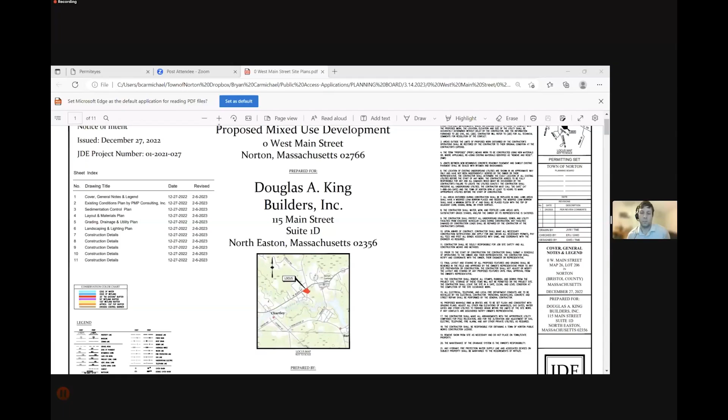Good evening, everyone. Greg Driscoll of JDE Civil here tonight representing Douglas King Builders for 0 West Main Street. All right, so the project is...

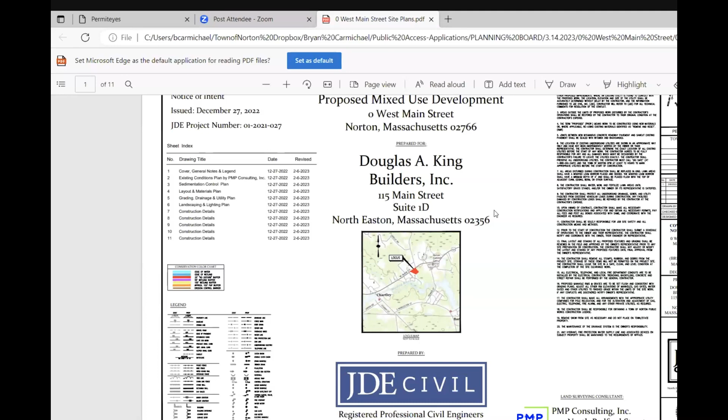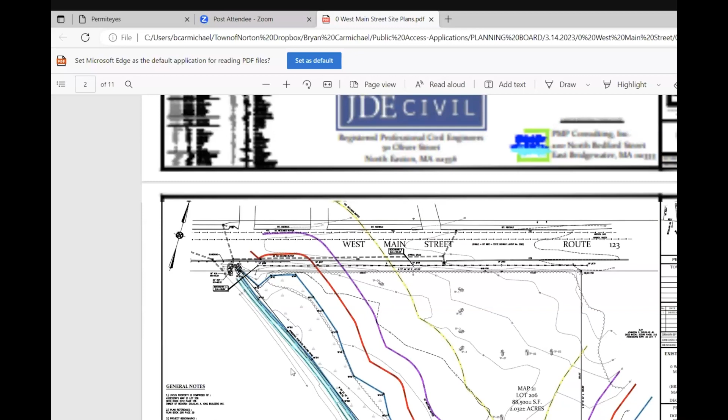We're located on 0 West Main Street, which is just west of the church and the middle school. We abut the River Crossing condominiums to the west and south. The site is located in the Village Commercial District.

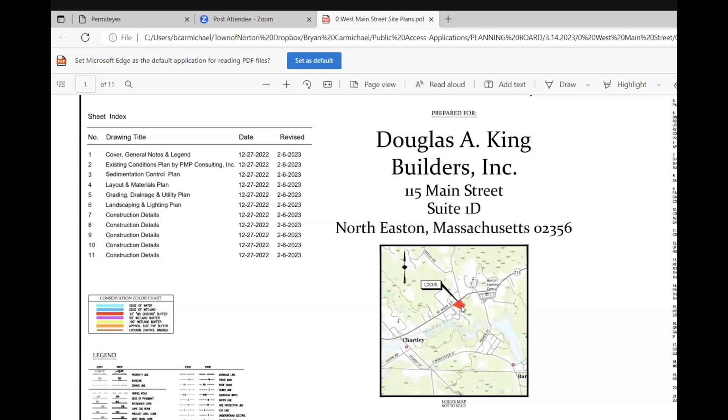So the existing site, if we could go to sheet number 2 - existing site is unimproved currently, so this is a new construction project. We were before conservation first for a determination on the drainage ditch there, and it is an intermittent stream. We just got order conditions issued last night for notice of intent for this project, so that's pretty much all set. Just waiting for them to issue the order.

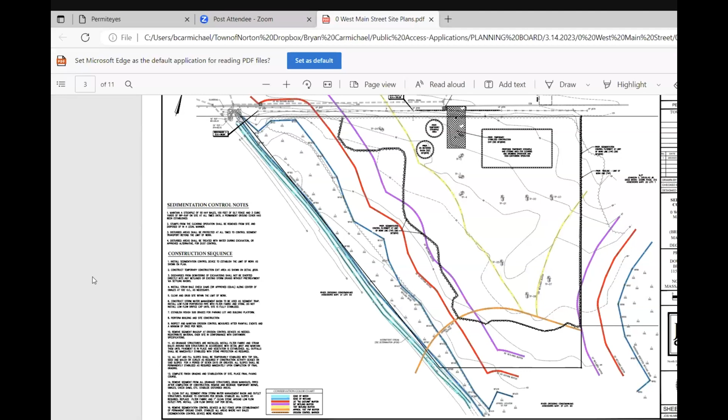If we go to the next sheet, sediment erosion control plan - this is pretty basic, showing the limit of clearing, perimeter, erosion controls, sedimentation controls, and limit of clearing. We're showing stockpile and staging areas, construction entrance, all that type of stuff that is typical.

The next page is the site layout plan showing the building. This project is for a 2-story building, 4,000 square foot footprint, 8,000 total. There'll be a 4,000 square foot dentist office on the first floor, and on the second floor, 4 one-bedroom apartment units. This is located in the Village Commercial District, and it's a mixed use we're proposing here, with top of the shop housing as defined in the zoning bylaw.

The site will be accessed from West Main Street, a full 24-foot aisle entrance and exit onto the site, showing appropriate stop bar and stop sign for the exits. The building is 15 foot setback from the front lot line. We have the 10-foot landscape buffer and then a 5-foot walkway to get to the front entrance.

We have 28 parking spaces. That's based on a calculation for office - I think it's one space per 200 square feet, so that's 20 spaces, and then 2 spaces per unit. We have 28 spaces required, and we're proposing 28, so it fits perfectly on the site.

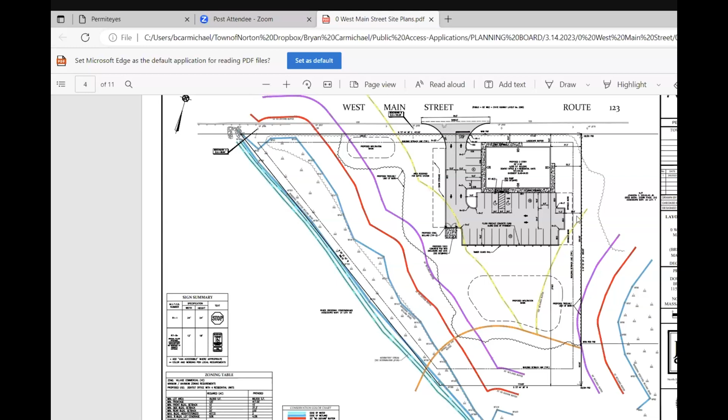If we go to the next sheet, below the parking lot you'll see we have the detention basin. So we have a proposed on-site septic system to the left of the driveway, right there, and then off to the south of the parking lot, we are sheet flowing the parking lot into 2 sediment forebays in order to get the TSS removal we need, and then an infiltration basin to hold, treat, and infiltrate the stormwater runoff.

There's also another smaller basin up to the upper left, on the westerly side of the site, that takes from a high point where the septic tank is down to the property line. There is a catch basin right there - we catch as much as we can of the driveway heading towards the street. There's also an existing catch basin in the street and the state highway layout. So once we get through the local permitting, we'll be able to go to Mass DOT for the access permit.

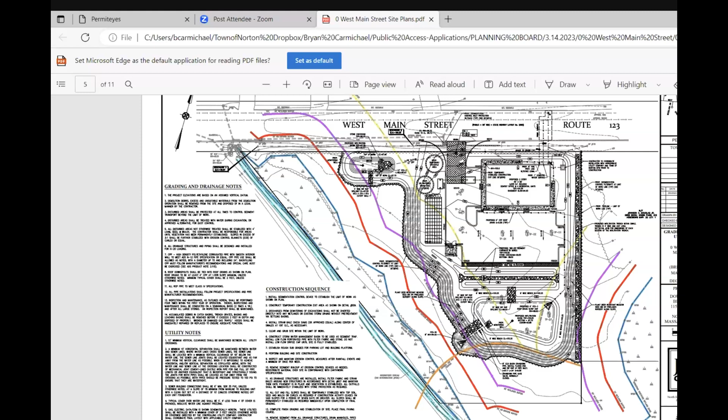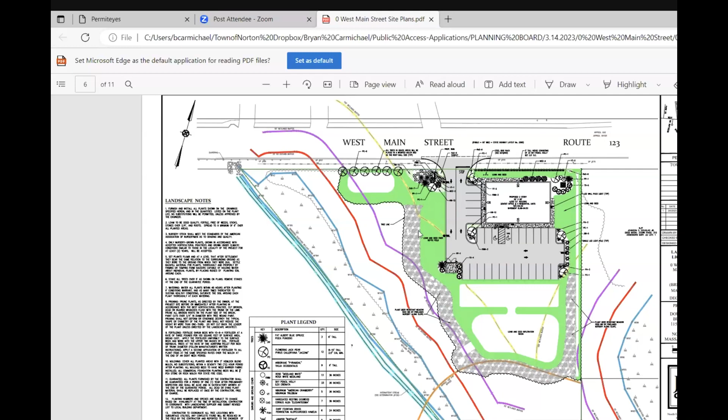If we go to the next sheet, we'll show the landscaping and lighting. We have a separate lighting plan as well, if you want to take a look at that - that's the landscaping we're showing for the project. I'm not sure if it's in that PDF, but we have a separate PDF of the lighting plan, and we show per the regulations that we don't have more than 1/10 of a foot candle off the site. I have that called up on mine if you'd like me to share. Take my word for it, that's fine as well.

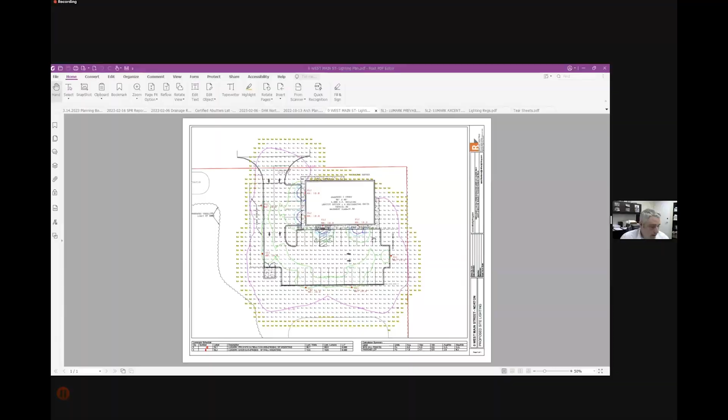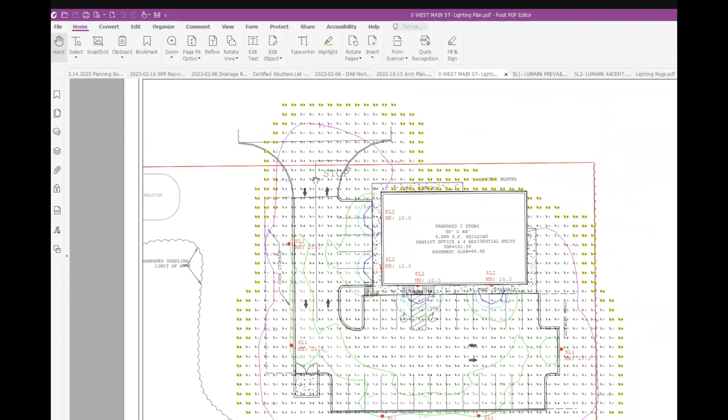So this is the lighting plan from Reflex Lighting. The highlighted area shows 0-foot candles at the property line, with just 1/10 of a foot candle a little over the property line here, but the rest of the site is all our property. We have a little extra light going out toward the entrance, since we do want that area a bit lit up at the roadway.

That's what we have there, and these are the cut sheets, which were also submitted and uploaded to Permiteyes for the fixtures being proposed. These are shown: this is the SL1 fixture and the wall packs are the SL2 fixtures.

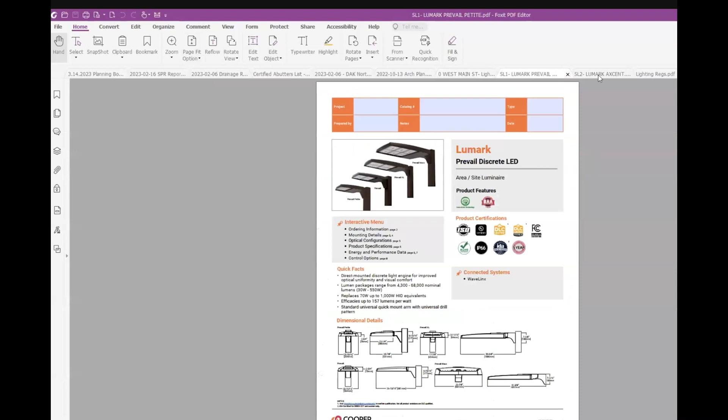I see a notation on there, MH20. Is that in reference to the maximum height of 20? Yes, and that's how they modeled the lighting spread as well. I believe that's the max height for the bylaw. Is that correct? Correct.

We were also looking at the lighting plan without the explanation, so let's make sure that's what we're looking at here, and there isn't an additional waiver or something requested. Yeah, no, I don't think we're requesting any waivers.

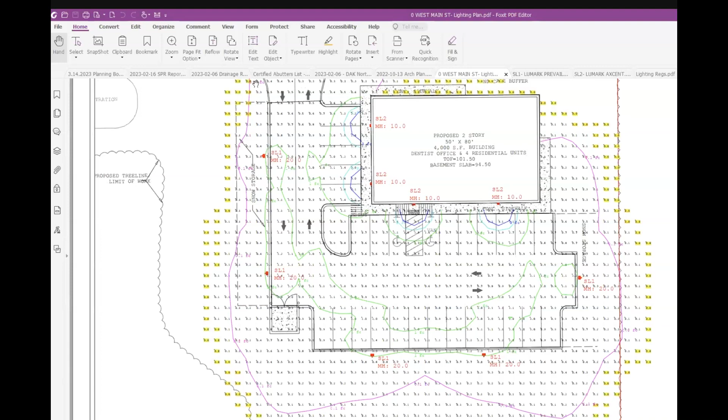I have those in the cover sheet. And then here are the building plans. These were also uploaded to Permiteyes.

So, exterior elevations, front and side, and all four sides. This will show you which ones are which.

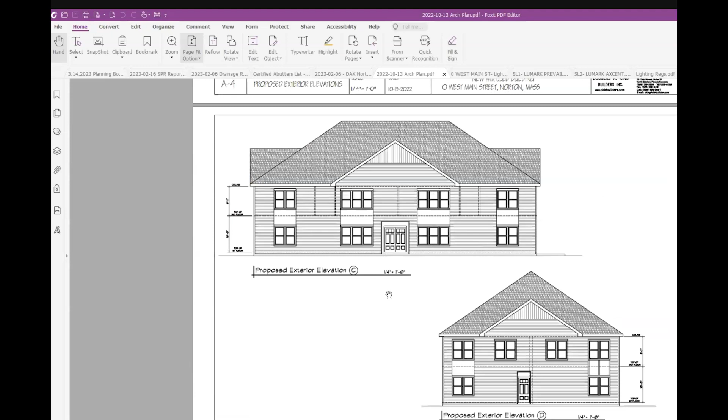Can you just, this may be a simple question, sorry to throw you off, but looking at the layout, can you walk me through how people go into the building for the apartments? Sure, because with the layering, I know they don't go through the dentist office.

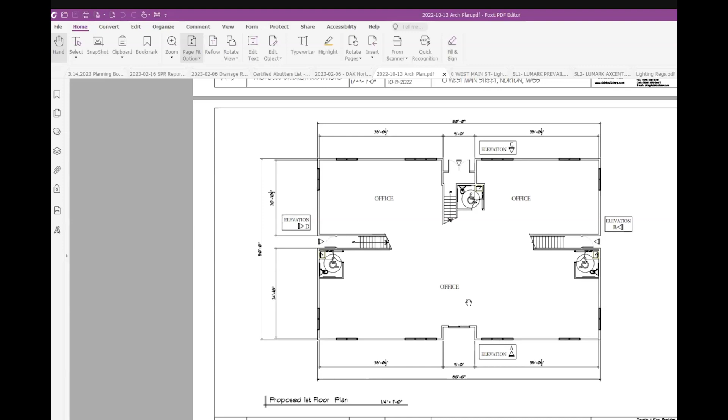So this is the front part of the dentist office - this will be the entrance directly into the dentist office. On the sides, these are egresses for the apartment units heading downstairs. Right here is a foyer, off the back parking lot. You come in and can go up to the apartments - I thought they might have had access to the dentist office, but I'm not sure that they do. And then on the second floor, you can see the stairway going down that way.

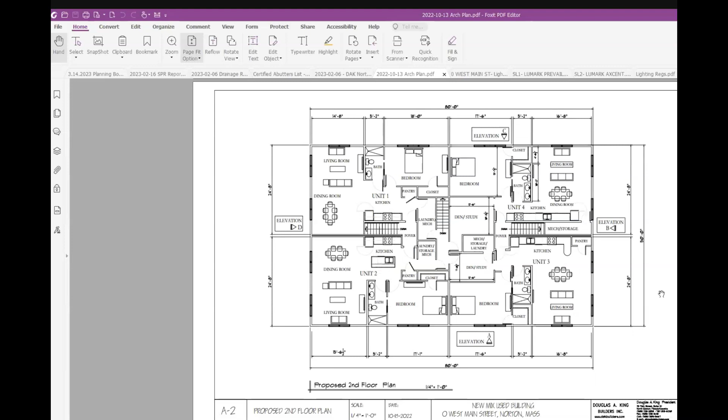So in theory, they're all entering from the rear of the building as we're looking at it from Main Street. Correct. Okay, that's pretty much what I have for the overview.

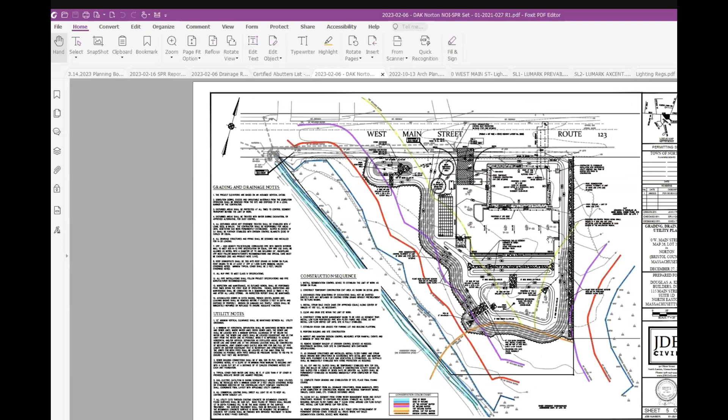That's pretty much the overview of the project. We did receive comments from the fire department regarding the fire service. We're showing right now one tap off the main and then the domestic off of the line here, but they want us to have two separate taps at the main, so that's a revision we'll make.

And anything else that may come from the board tonight? Okay.

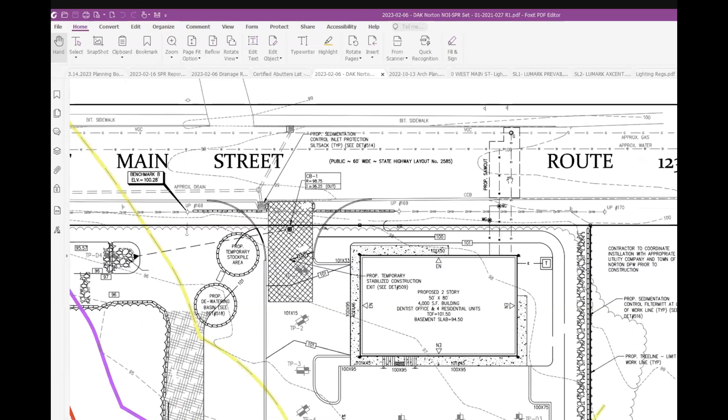Maria, I know you had a couple of comments that you shared with us in your memo. I got the answer to the lighting question, but you also had some potential notes regarding buffer and screening, correct?

Yes, so our bylaw requires 20 feet of screening to abutting residential properties, and I believe it's the eastern side - you would need a landscape buffer there, and you don't currently have one. So that would either require a waiver or an amendment to the plans.

And I don't know if you got the memo I sent. I did not. Okay, I can send it to you. But it's section 6.5 of our bylaw, because it's a commercial district abutting a residential zone. That's why we require 20 feet of screening.

Okay, residential zone or residential use? A boundary, it actually doesn't matter - they're for both. In this case, because it is a residential property, regardless of zoning district, it's 20 feet. If it was a residential zone, it's 50.

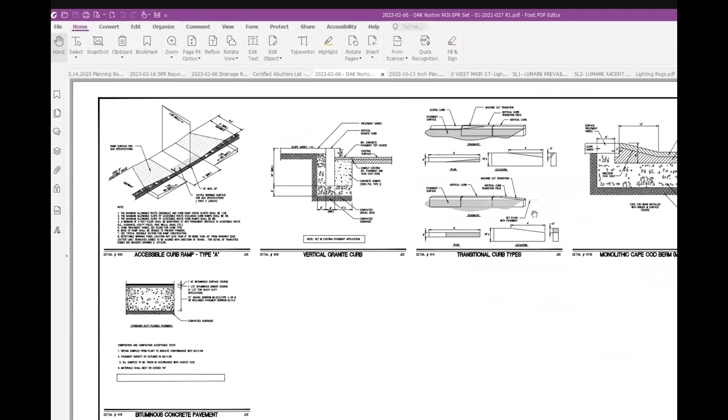Do you have any proposed signage for that dentist office? We are not showing it currently. There's a sign shown right here. I don't know if we have a designed sign, like what they're actually going to put up, a rendering and everything of it. But I can add something like that to the plans - I can add a sign detail.

That's what you prefer, that would be great. We have a sign bylaw and I'll send you the section, but we allow up to a certain dimension depending on the district, so I just want to make sure it's the right size. They have to be illuminated by exterior lights, not like a billboard type sign, etc.

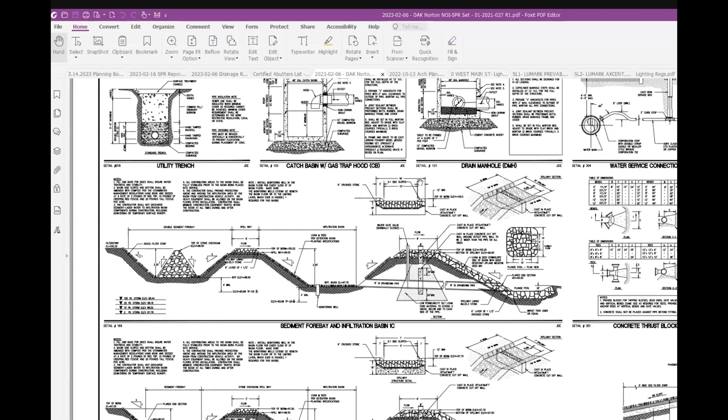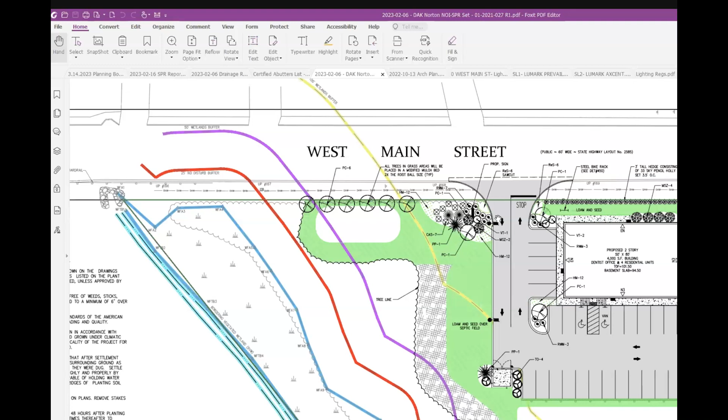And I had one last thing, and this might be really minor, but because you're in Village Center, we have a requirement that you need lots of windows, but they don't say what lots of windows means. So I don't know if the planning board thinks the architectural plans satisfy that requirement, because we don't have a threshold for it. I can pull up the language - it says you should provide an appropriate proportion of first floor facade as windows, doors, or other treatments sufficiently transparent to provide view to the interior of the building. But I don't know if that's 20% of the building or 40%.

I don't know if the planning board has any strong feelings on our bylaw. I guess I'll throw that to the board and ask how they feel about what we're showing.

Thank you for highlighting that, Maria. Of course. Yeah, I'm not sure - at first blush that seems appropriate to me, but I am only one voice. So if any other board members feel that there are portions of this front facade that we should look at from that perspective, please feel free.

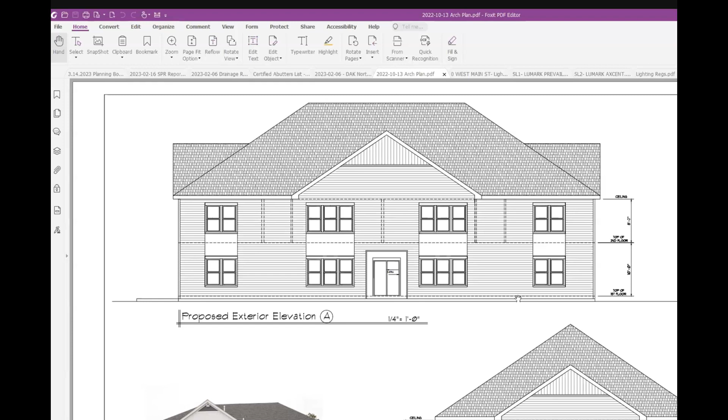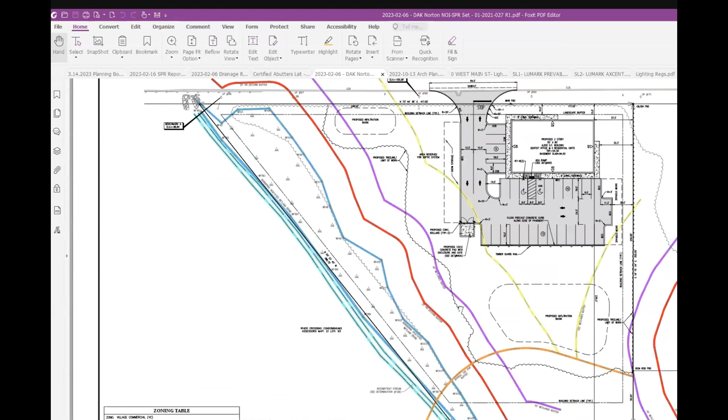And Mr. Driscoll, if you could just go over to one of the site plans. There was a question from a member of the public asking to highlight where on this plan the river is. There will be a portion of the virtual meeting where I ask directly for comments from members of the public, but I wanted to address that one from a wayfinding perspective so everybody looking at this can understand what we're doing.

So this light color right here, this is the intermittent stream, both sides of it, between the two teal lines basically. And then this is the BVW line, that's flagged, and this is as well. And you mentioned that you just got issued the order of conditions for that. Yep, they voted to approve it last night - not in receipt of it yet, but yep.

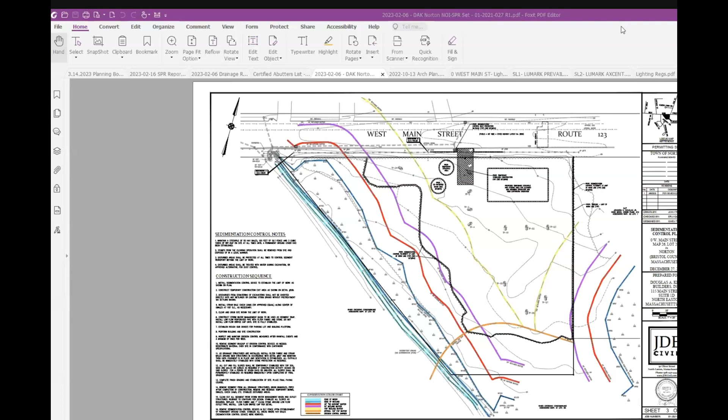Again, we will have a portion of the meeting where we ask for public comments. Comments submitted in the Zoom chat - we're not going to be reading comments from the chat into the meeting, so just hold on and we'll get to you if you are looking to speak or ask questions related to this project. Please use the reactions function in your Zoom meeting to raise your hand, and we'll know you're waiting to speak. At this point, I'll ask if any other members of the board have questions for the applicant based on the plans they've presented.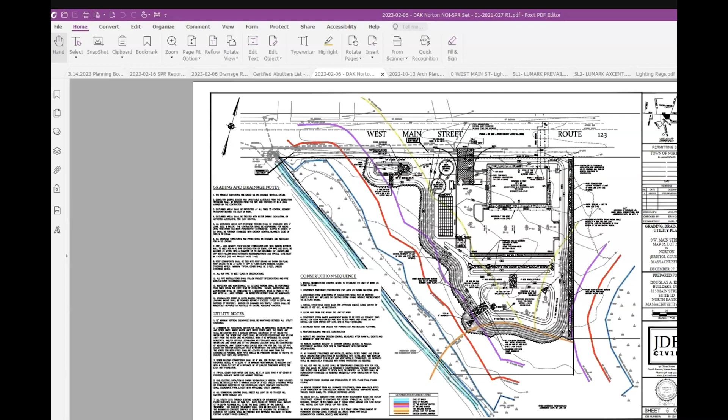Just a quick question regarding the septic tank. I know dental offices tend to produce a lot of chemicals and different types of waste. Is there a certain size required by local or state law for that septic tank, and does this meet those requirements?

They size the septic tanks based on how many dentists there are in the practice. And yes, we size it per that, as well as the number of bedrooms for the residential units and all that.

Thank you. And dentist offices these days use a lot less water than they used to. Have the bylaws changed with that, or are they still kind of lagging? Title V has not, I don't think they've updated that. But it kind of takes into account everything with the dentist office, as far as how many dentists they have, their staff, and stuff like that.

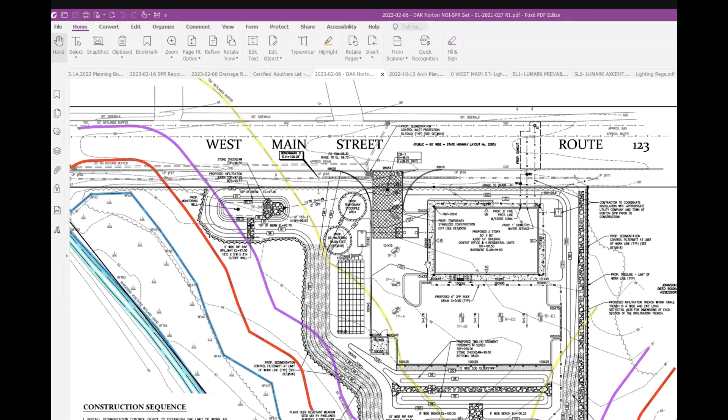Okay, any members of the board have questions for the applicant at this time? Otherwise, I'll go to any members of the public who are looking to speak or ask questions.

My only question is, are there any EV charging stations required? I know more and more in mixed use they are required, and more in residential construction. I'm just not sure what triggers it.

Might be a building inspector question. Alan, I might be able to speak a little bit to that, although I can check with their building inspector tomorrow. But the only place that requires EV charging stations is Boston, because I looked up implementing a bylaw like that in Sharon, and it's not required in any other town or city outside of Boston, because it's hard to calculate exactly what percentage of use should be dedicated to EV parking. But I know there's also new clean energy regulations coming for new residential construction, so I can check with the building commissioner and get back to you tomorrow.

It's worth just the ask. Every time they update the code, there's more and more with EV, and I've lost track of what triggers it now.

I know with bigger projects, we have a couple bigger projects right now that have MEPA triggers. This is obviously way too small for that, but MEPA is requiring them for bigger projects like the new Raynham Park Simulcast Center. We're doing them for that.

So Alan, if you want to write a bylaw for Norton, you're free to submit that one to town meeting yourself. That would be on the bottom of my list of the stuff that I would work on.

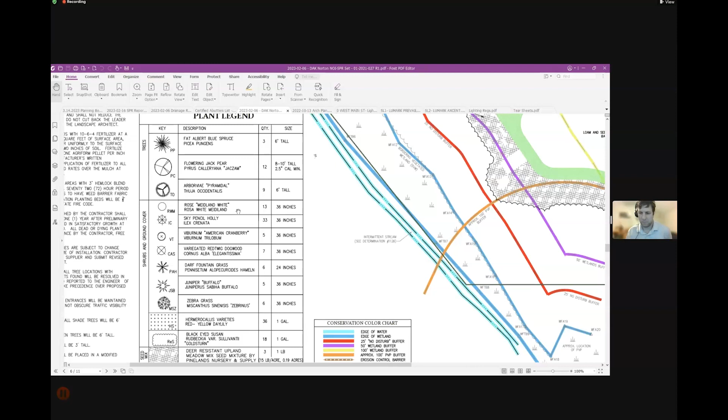Any other members of the board have any additional questions or comments for the applicant at this time? Obviously we can come back to it, but I do know we have a couple members of the public online. Just out of mild curiosity, and they don't have to answer this, is this an existing dentist office in town that's moving to this new space, or would this be a brand new office that you're aware of?

Potentially, he has an agreement with a buyer. Okay.

I'll ask if anybody attending the virtual meeting as a member of the public would like to speak. If you would like to use the reactions function in Zoom to raise your hand, you can do that, or you can just unmute. But if people are raising their hand, I'll try to take them in order so we don't have complete chaos here. I see somebody whose screen is labeled Dave Miller. I'll also ask if you can unmute yourself and state your name and address for the record, please. You can leave your camera off if you choose, or come on if you'd like.

Dave Miller, 227 West Main Street. I was just curious to know, is the 4 units allowed by right because of the lot size, or are they not requesting additional residential units beyond what they have by right?

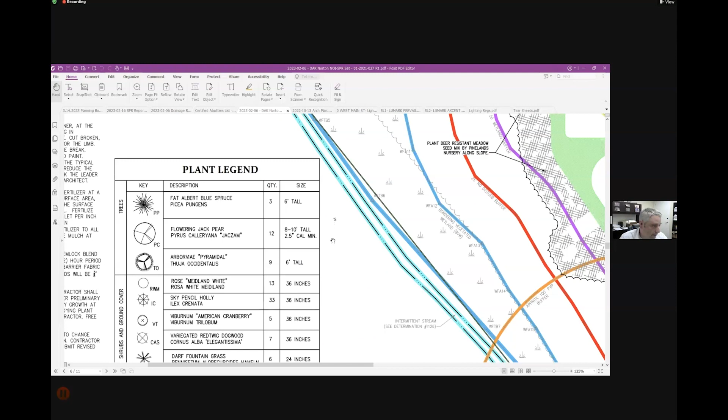And the trees—these are the heights they'll be at planting, but they grow, and they'll grow pretty quick over. They can be 12, 15 feet within like 10 years or so. A lot of these types of trees we have shown here, so they'll fill in, they'll be bigger like they're supposed to, and provide a good landscaping look for the property.

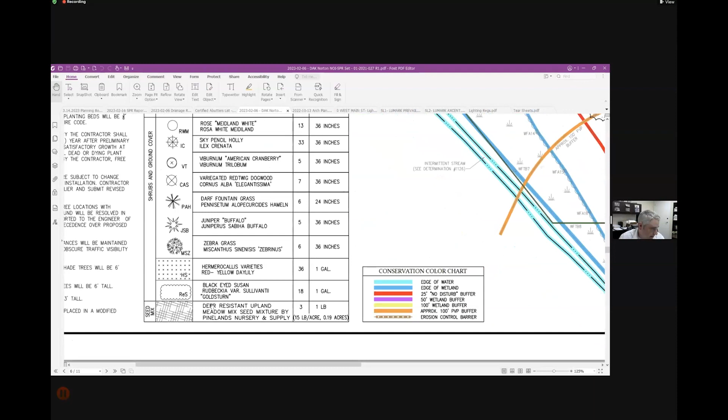And did you mention the hatched area on the edge of the plan? That is—calling out right here—a seed mix, just an upland meadow mix. So yeah, that'll be a brushy kind of area, and I'm sure some trees and saplings from the wooded area will migrate into this area, and we'll have trees start to crop up over time, because this area won't be mowed or anything really. We'll mow on top of the basin or anything like that for maintenance and access, and of course over the septic system, but otherwise after we seed this, it'll be pretty much left alone through here. Okay, thank you for the details there.

Did you have any additional questions, Ms. Moskowitz? Yes—how many of the plants are native? I have to ask my landscape designer about that, but most of them are from the native list, I believe. And then the other question is, the Jack pear—is that similar to the Bradford in that it will split when it gets higher than 15 feet? Can we look into that? We have a huge problem over here with Bradford pears.

Oh really? Yes, so the pears are the least expensive trees that landscapers can use. And when they get to a certain height, if you don't trim them, which is very expensive to do, they will split and you'll lose the tree. So it's a relatively short-term proposition, but not fun when it starts coming down.

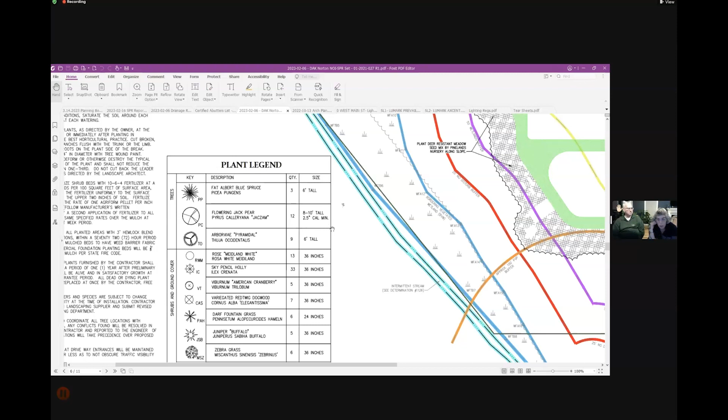I just think also when you make decisions about the plant, it should be native. We can do a little bit more, even if we don't have to - ethically, there are certain things we should do. I asked about the grass, because grass equals fertilizer. Grass is very 20th century. We're moving towards a society where you're going to have meadows - you're laughing, but it's true. You're going to have perennials.

My husband can't - it's a lot of water, water and fertilizer, it's maintenance. And if you own a building and a business there, you don't necessarily want to be maintaining it all the time. So something that looks good and has less maintenance is a good thing.

Yes, anyway, that is all. But thank you for listening. Thank you for participating. Okay.

Any other members of the public who have joined us in this virtual meeting who would like to ask any further questions or have any other comments related to this project? I'll wait for anybody to come off mute or raise their virtual hand here.

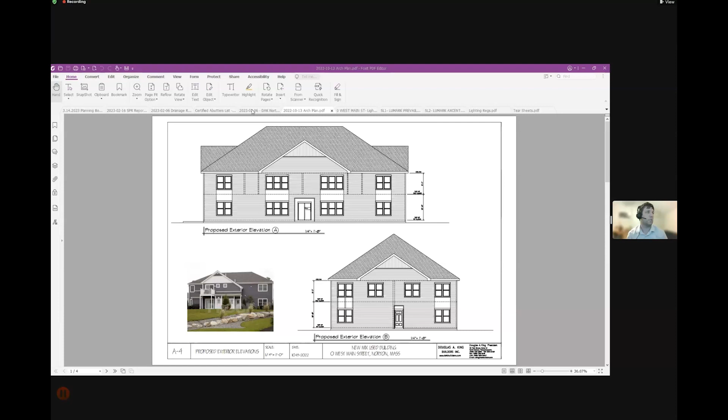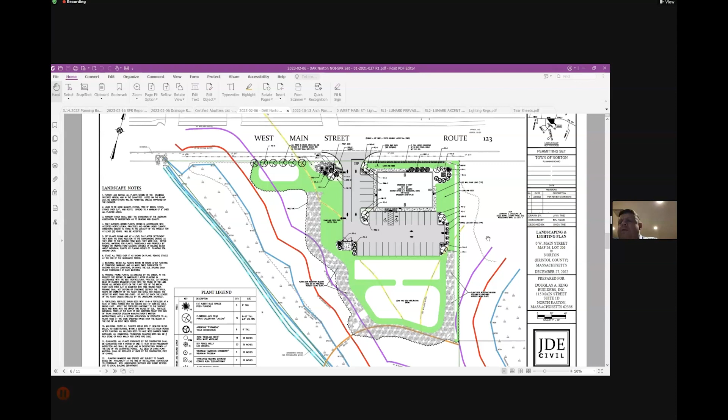Buffers is one change, meeting the bylaw, making sure that we're meeting the bylaw as noted, and as well as adjusting some of the trees. I would be fine with moving forward with approval, just with the conditions, with the landscaping and the issues that we talked about. Like I said, again, I'm fine with the windows as are, I think they look good. So I'll swap out the trees, I'll add more landscaping along here as a buffer to this property.

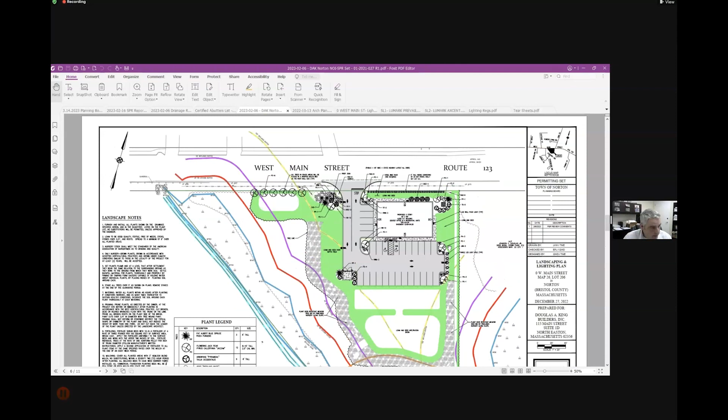Do we have enough room for a 20-foot buffer there? I don't have a scale or anything in front of me, I can't tell. I have 20 feet from the edge of pavement here, but there is that swale through here, so I can't put plants right on the swale, but I have 20 feet there and 32 feet to the sidewalk here, so I can actually beef up the landscaping along here.

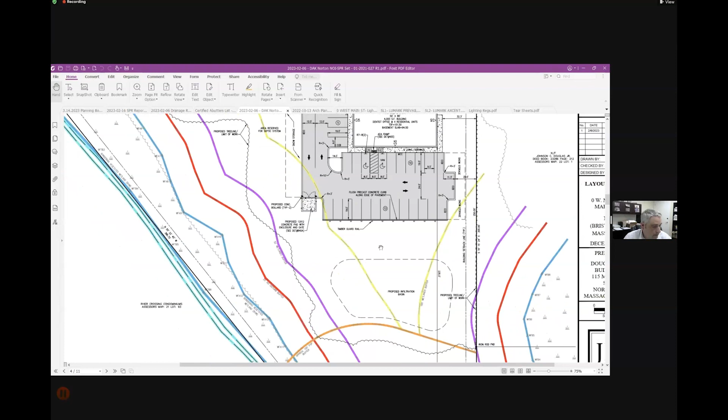That is pretty tight, but yeah. Maria, did you have something? Yeah, so if we could also get a number on the landscaping buffer for the frontage, just so we can make sure that you have enough plantings as required by bylaw. I think you're very close, if not there, but I just couldn't really tell from using a scale. It's a little easier in AutoCAD, so.

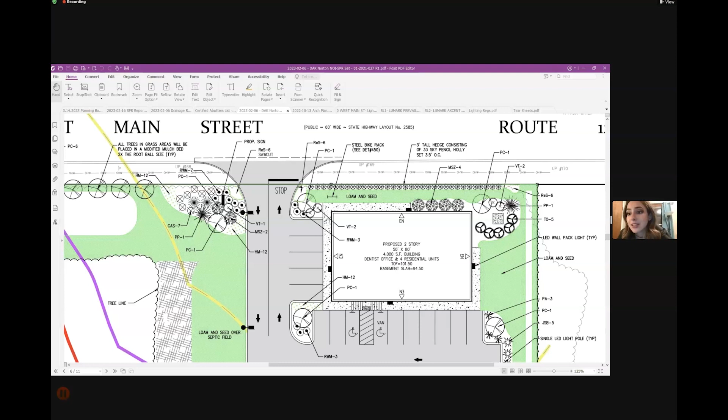Okay, so it's this area right up in here that I need to calculate, right in front of the building, or along the whole frontage? That's where our bylaw's not specific. Okay, I calculated it in front of the building and where you have the trees on the western side, just because that's where I saw it in green. But if the planner has any preference, if they want the screening, what exactly is the landscape buffer? How far does it extend? Is it the entirety of the frontage or is it just the front of the building itself? Because that's going to change the requirements. I don't know if you have any thoughts on that.

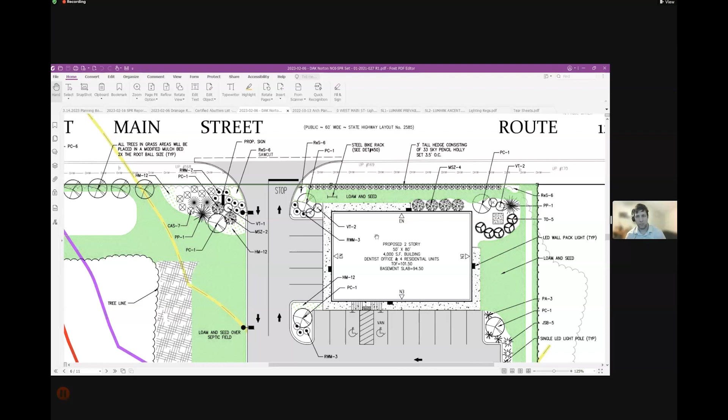Okay, so Maria, the question is whether, if we were to approve this evening as is, we would potentially be needing to include a waiver for that section of the bylaw, and or including a condition that it's met. Yeah, so I almost see that as an either/or. Either we're giving a waiver or we're asking for a few additional shrubs to meet the requirement. It's tough to have both of those at once.

Yeah, from what I saw, it was like over 100 little shrubs, and they have those. They have plenty, they have the 3-foot little hedge at the front, they have the trees. The shrubs are just another layer of landscape on top of that. And like I said, they seem close enough that I feel like a waiver will be okay because the landscaping plan is good, but that's your decision. And again, I couldn't calculate. It was a little hard for me to do it just with the scale, but... okay.

So, just looking at your memo again, Maria. So we have the windows, we have the buffer requirement, with the shrub calculation, which is a potential waiver. We talked about the lighting. Signage, we don't have signage shown on the plans now, but with the understanding that they would meet the bylaw.

The only other thing, they get a sign permit anyways, I believe, right, from the building inspector? But how does that work? Do we need a sign permit from the building inspector? Maria, is that... they're usually some of them you can do by right, so you can just put them up, I believe, and some of them are regulated by the planning board, that's why the size of the sign matters. But I can check with the building inspector on that and the EV parking requirements tomorrow. Okay, yeah, we'll make the sign whatever size it needs to be as required.

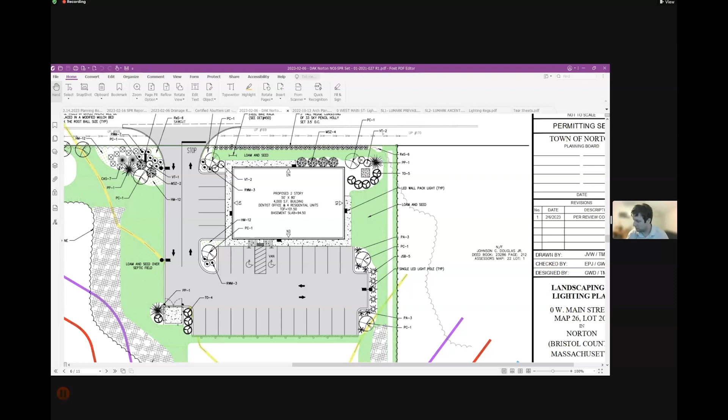I guess, just a quick question. If you did do a continuance, how much time would you need to resubmit? Not much, it's pretty minor stuff. I'd like to be on the next meeting on the 28th. I know you have a busy night that night. So it's kind of why I was hoping to go for conditions of approval.

And a revised set of plans could be reviewed and approved by Maria before issuing the actual decision. Yeah, I could have it ready for the next meeting. Thank you, Mr. Driscoll.

How do you feel about closing the public hearing? They submit the documents, we see them before the meeting, Wednesday before, and then we go right to a vote in the next meeting. I believe a revised set of plans would count as evidence that we can't take in when a public hearing is not in session. Gotcha.

It just seems to me there's one too many things up in the air. That's just my opinion. Yeah, I agree with that.

I'm gonna make a motion to continue SPR 18291 to March 28th. Seconded. Okay, we have a motion by Eric and a second by Danny. Is there any further discussion on the motion to continue to the 28th?

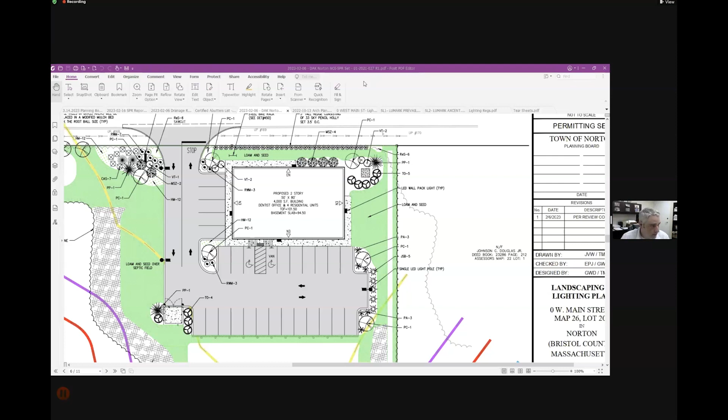So that item is continued until our meeting on the 28th, where we'll also be talking about town meeting bylaws and a few other items.

Is there anything else anybody would like to discuss during tonight's meeting as we have reached the close of our posted agenda? Motion to adjourn. Thank you, Alan, for the motion and Wayne for the second.